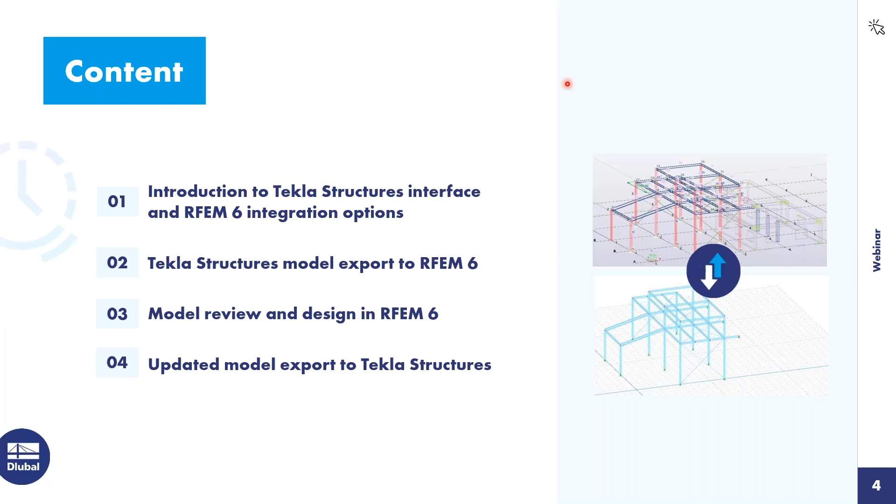So I will begin with giving some general information on the Tekla Rfem 6 interface. Currently, the interface supports Tekla versions 2021 to 2024. This interface is a direct one between Tekla and Rfem, and so the two programs need to be installed on one single PC. Then you want to make sure in your Rfem 6 program and option settings that web services is checked on here.

So that every time Rfem 6 starts up, it will start up the web services. This should be on by default, but it's always good to check that. And then the plugin also must be manually installed after installing Rfem 6. You can find that setup file under this pathway after you install Rfem 6, and then once you install that, you should be good to go.

The structural objects that can be transferred between Tekla and Rfem 6 include members and surfaces, sections and materials, supports and hinges, along with rigid links.

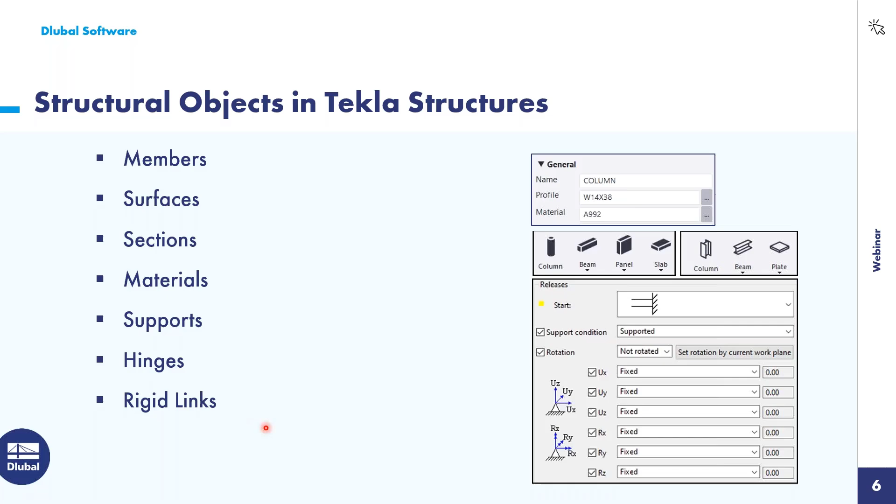Here are the export options. So if you are exporting from Tekla to Rfem, these are the export options you will get. The first option you can see here is the physical model option, and this is basically like a CAD model. So it's the solids without any consideration of the axial positions.

You can see here with this would be a physical model. And if you would export this physical model, you can see that the axial positions here are not lined up or connected at all. The wall here is basically just framing into the bottom of the slab, so there's going to be a space there. And so if you export this physical model, this is what you're going to see in Rfem, which isn't good.

So what you need is an analytical model to be created. You can see here that the axial lines of each element are connected correctly, and so then you will get that correct analytical model in Rfem 6, which is needed to run the structural analysis. So that would be the second option here. Analytical model is what you'd want to choose if you're looking to run a structural analysis.

Next, you have this option for exporting rigid links, which is checked on by default. So if any rigid links are defined in Tekla in the analytical model, then those will be exported into Rfem as well. This option for creating a unique profile for each set of members is checked off by default. If you check this on, then the same cross-sections are going to be given separate index numbers. By default in Rfem, a similar cross-section is summarized with only one index number, so you will get unique index numbers for similar cross sections if you check this on.

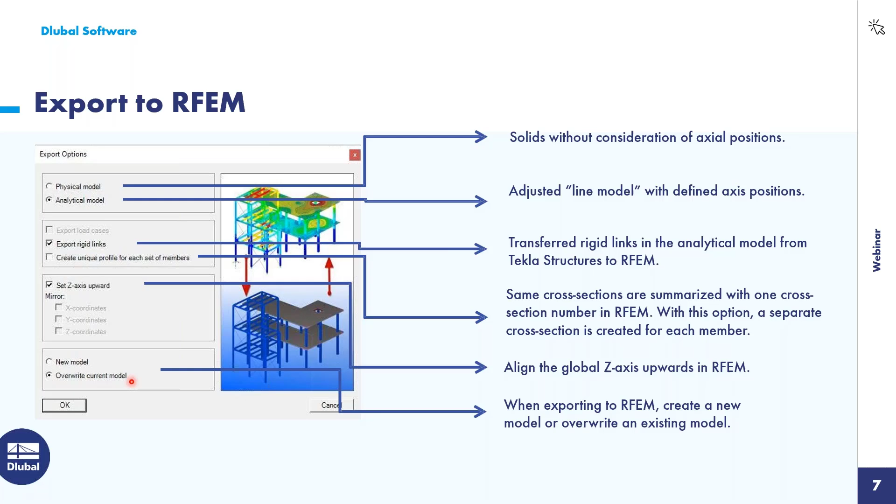Then we have our import options. So here we have a couple import types. This is when you're going from RFEM to Tekla. So you can overwrite an existing model, you can append an existing model, or update an existing model. Overwrite means it'll completely wipe the file and everything will be started from new when importing in. Appending is more for adding if you're looking to add some additional members or parts to the model.

And then update should be used if you're looking to update things like materials, cross sections, and then it can also do new objects as well. And then here's some mirroring options if you're using the overwrite or append option. And so you can choose to mirror about the X, Y, or Z coordinates with that option.

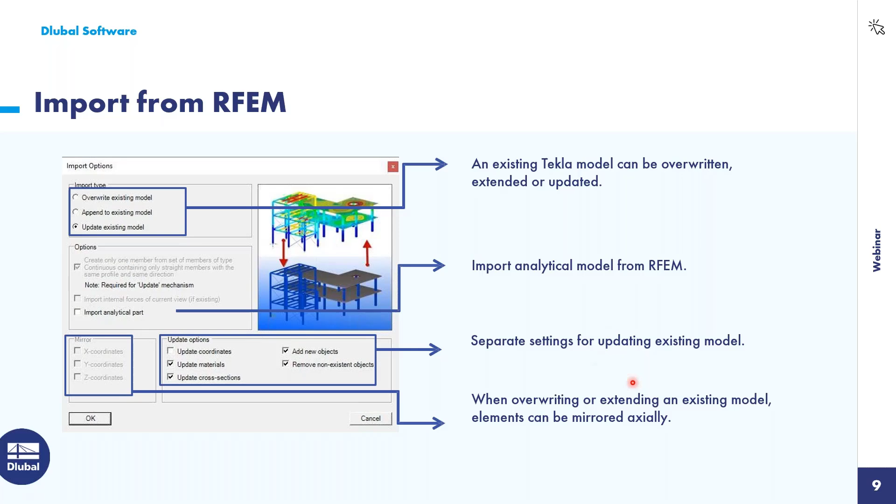And so I would like to show you, we have some documentation on our website regarding regular expressions, if you're not sure how to create regular expressions. This FAQ is linked in the PDF, which you can download anytime during this webinar. And so a regular expression basically allows you to convert a whole series of sections with just one expression.

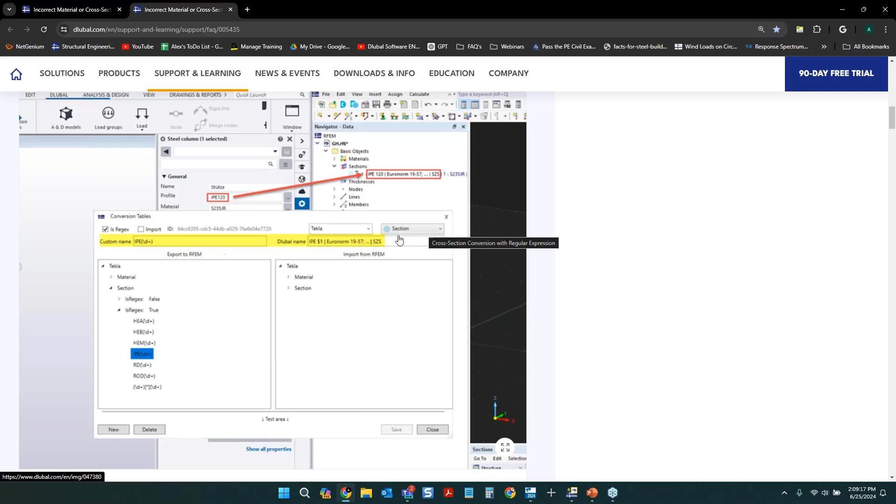And then you can see down here in the conversion table, this is what entering that expression would look like. So on the left-hand side here, you have the Tekla name. On the right-hand side, you have the Dlubal or RFEM 6 name. And so you would create a new expression. And when creating a new expression, you choose if it's a regular expression, if it is an import or an export conversion, and then you can choose if it's a section or material with that dropdown. And so that is how the conversion tables work.

Next, I would just like to go through a couple examples of possible workflows between RFEM and Tekla using this interface. So the first possible workflow is to take the analytical model in Tekla and export that into RFEM. So information about sections, materials, supports, etc. will be exported into RFEM. Then in RFEM, you can add some loads and run an analysis and do some design and optimization. And then any sections or materials or new objects that are added or changed in RFEM can be updated back into the Tekla model.

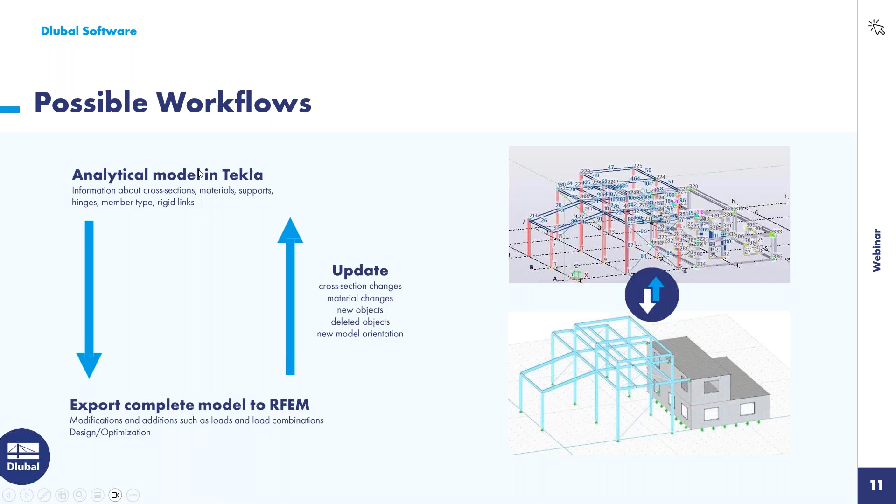And then the third possible workflow is taking a structural analysis model from RFEM that you've modeled and created with some loads and design and optimization, and then that can be imported. The complete model can be imported to Tekla or only part of it, and then you can continuously update that Tekla model as you make changes such as sections and materials, etc.

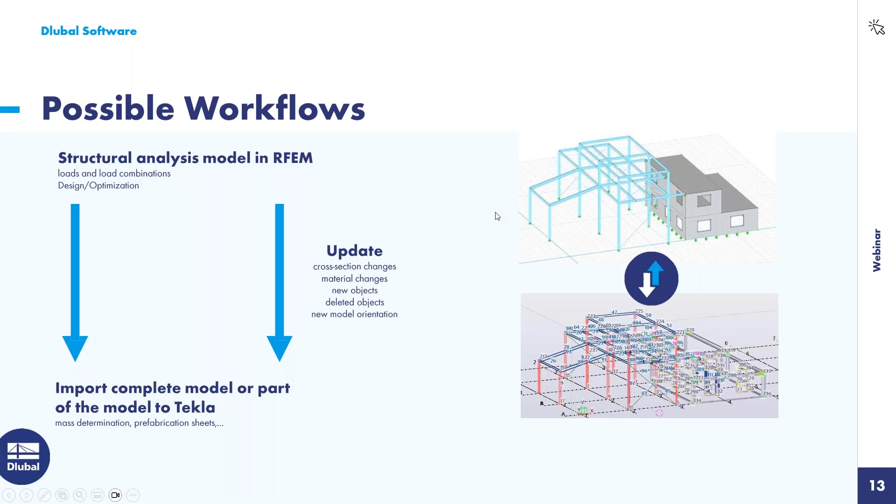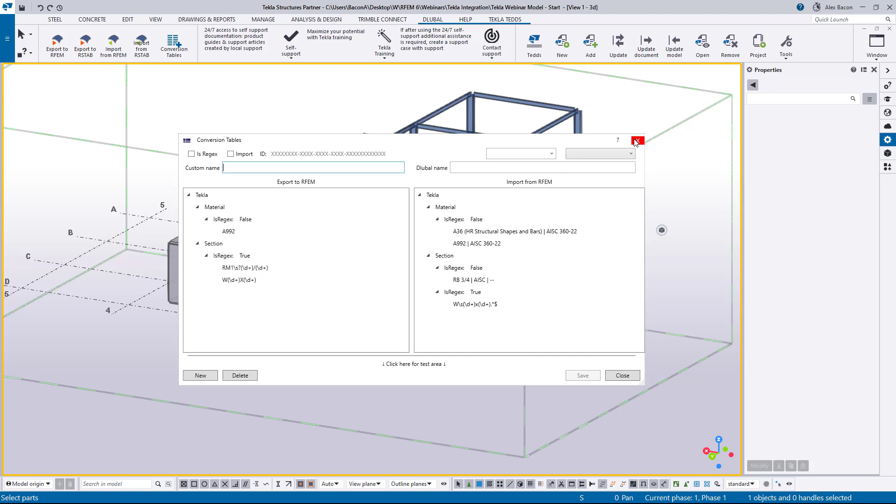And with that said, I want to now export this model into RFEM. So I'm going to move the window over, and you can see here I have a blank model of RFEM opened up. And so now if we export to RFEM the physical model, we can see what that looks like.

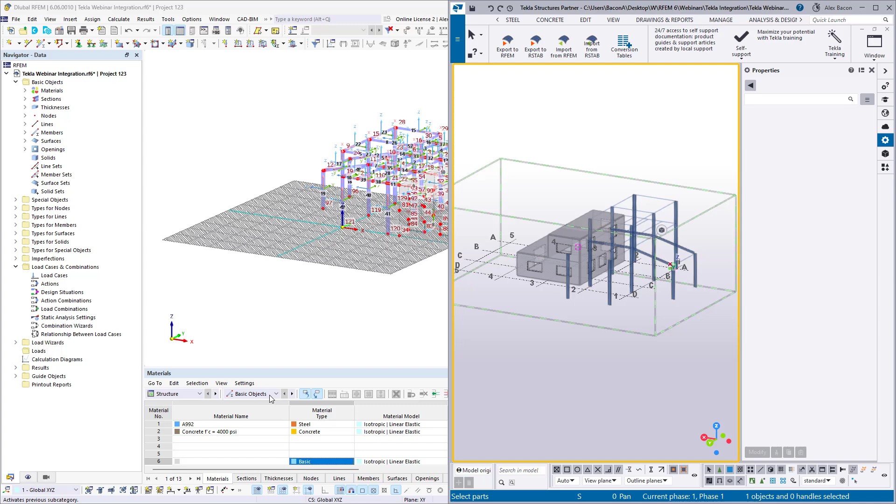And so the connection between the two programs is going to be made. Once that's made, you can see the status in the bottom left-hand corner of RFEM will show that the data is being transferred. And now we can see our model in RFEM. I'm going to turn off the numbering and also the axes and the grid.

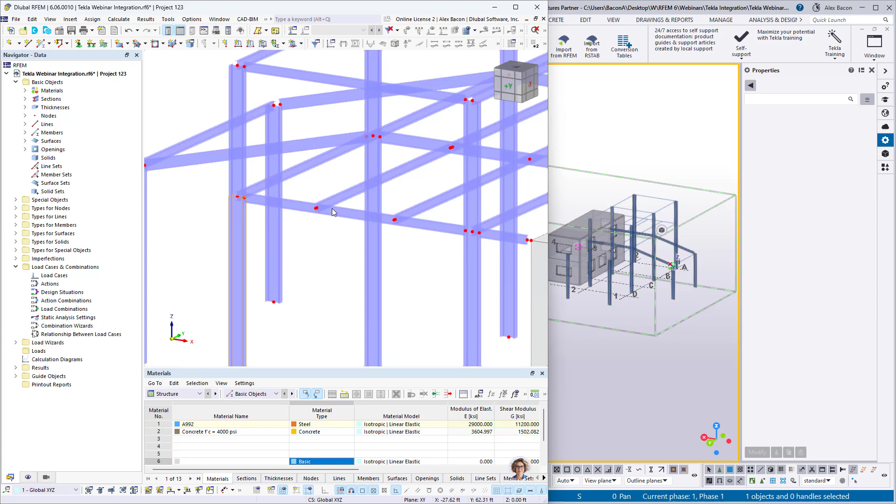If we zoom in here, you can see that it looks like our members are connected. So it looks like our beams are connected to our columns. And if we go into Tekla, we can see that that is also the case. But in RFEM, if we change our model from a rendered view to a wireframe view or an analytical view, you can see that those members are not actually connected in the wireframe.

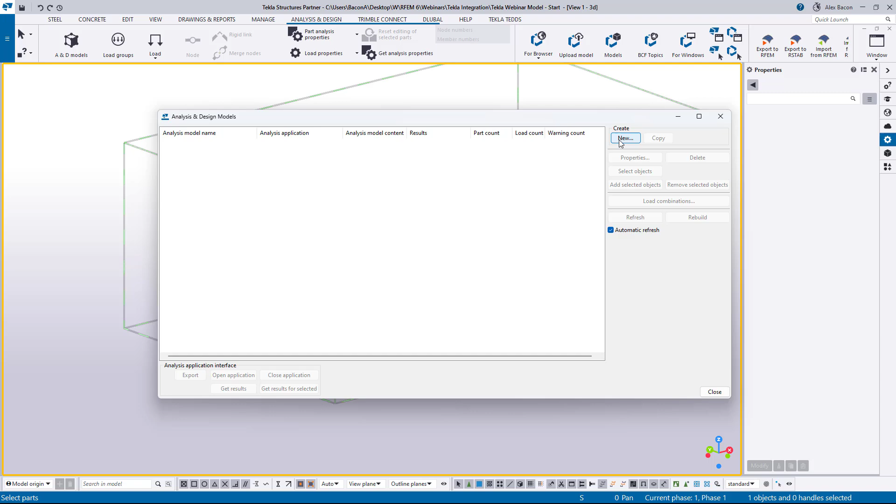So what we need to do to fix this is in Tekla, we need to create what is called an analytical model. To do this, we can go up here to the analysis and design, and we can open up the analysis and design window here. This is where we can create a new model. So we will click on create new, and this will open up another window with some basic properties to define.

In this dropdown, these are just some old RFEM 5 presets that we don't need to pay any attention to, so we want to set those to blank. Then for the name, we will give it steel, because we're only going to focus on the steel portion of this model. It is possible to export the concrete surfaces as well, but we are just going to focus on the steel for now.

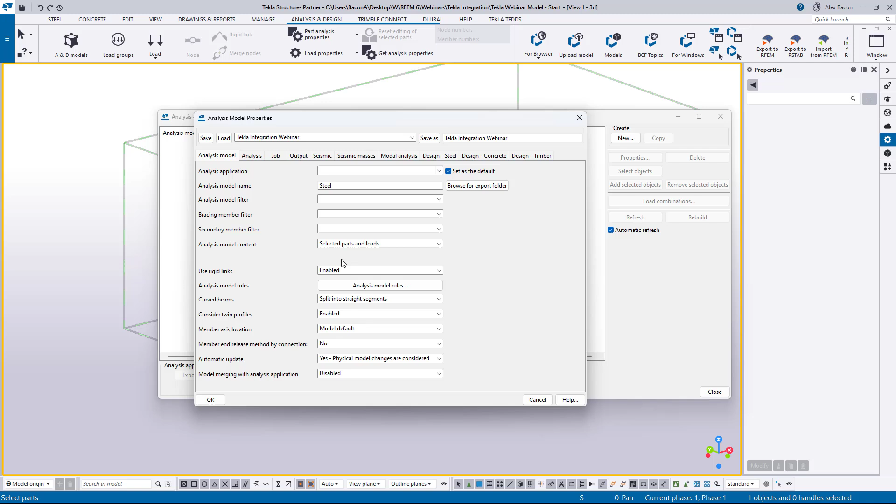You can also define some more settings here, and once you have those defined, you can save them as a preset. You can see here that I have a preset defined, so I can choose that and click load. Now all of my settings from that preset have been loaded in, so you don't have to define these every time. Now I'll click OK, and we have our analytical model created there.

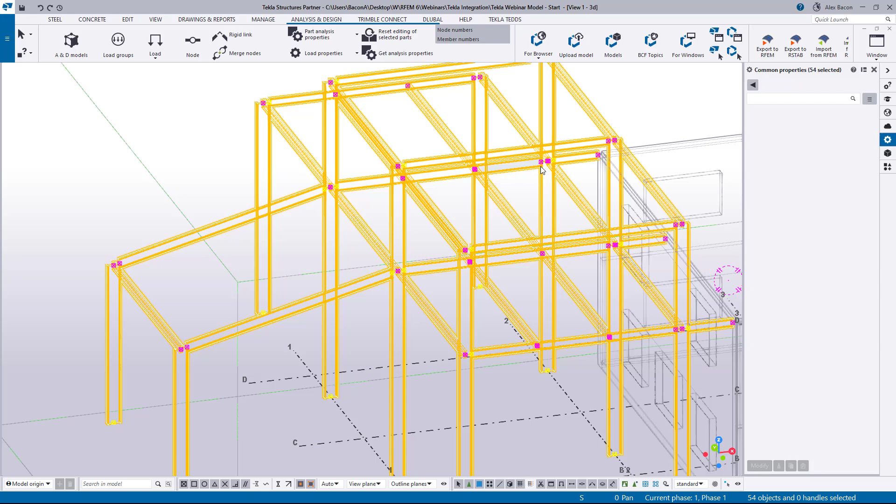And now what we need to do is select all of our steel members to be taken into consideration as the analytical model. One thing I would like to note is if you have any steel connections here, you can have those not be selected, because we don't want to create analytical models based on any of the steel connection components that are defined in Tekla, because those are just profiles and they won't transfer over to RFEM correctly.

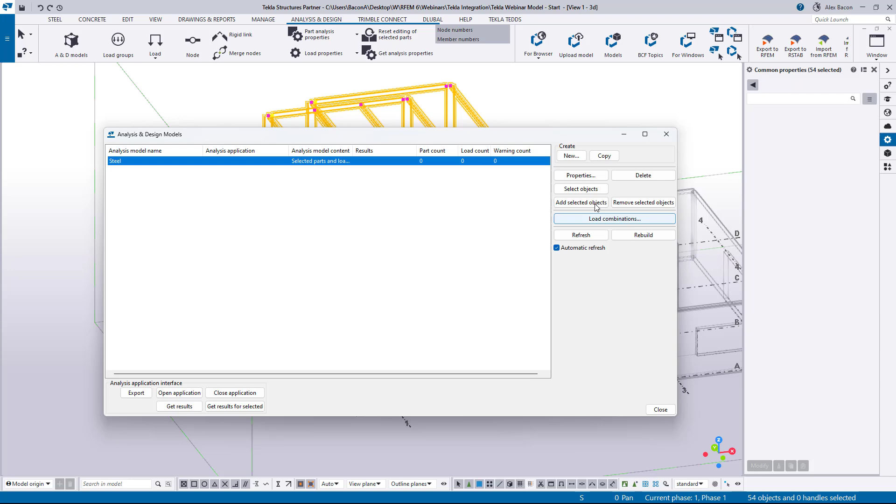So you can turn this button here off, and you won't select those components when selecting the model that you would like to convert into an analytical one. Once you select those members, we can click Add Selected Objects. And so now we have our members here. You can see we have our analytical members created.

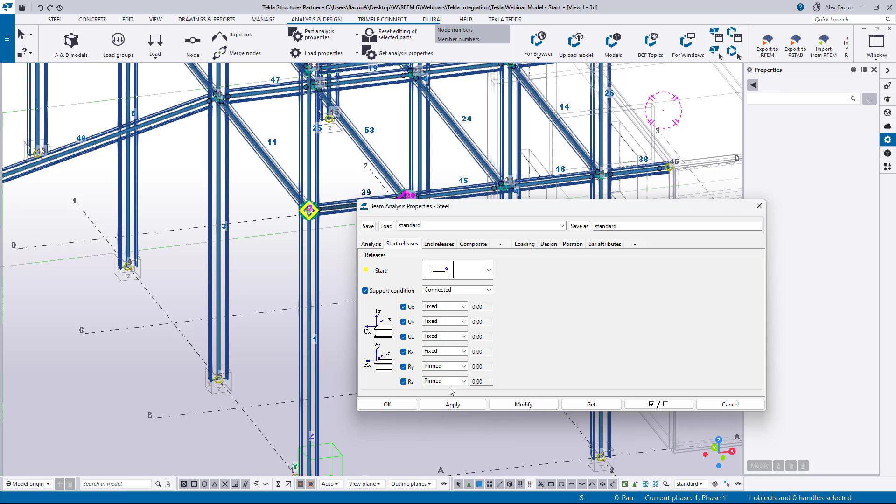And these are generated based on the axes of the beams and the columns. So that is how they reference the center of the beams and columns. And I can double click on one of these to show you those properties. So you can see here this beam is defined as a beam with some start and end releases. You can see by default these are pin connections on all of these.

So what we want to do, and you can change this setting in the future so they are rigid connections, but for now I'm going to highlight the whole model and I'm going to double click on one of these beams, and we want to change that connection to a rigid connection. So we'll choose connected, rigid connection. We want to choose connected again, and we want to choose our rigid connection.

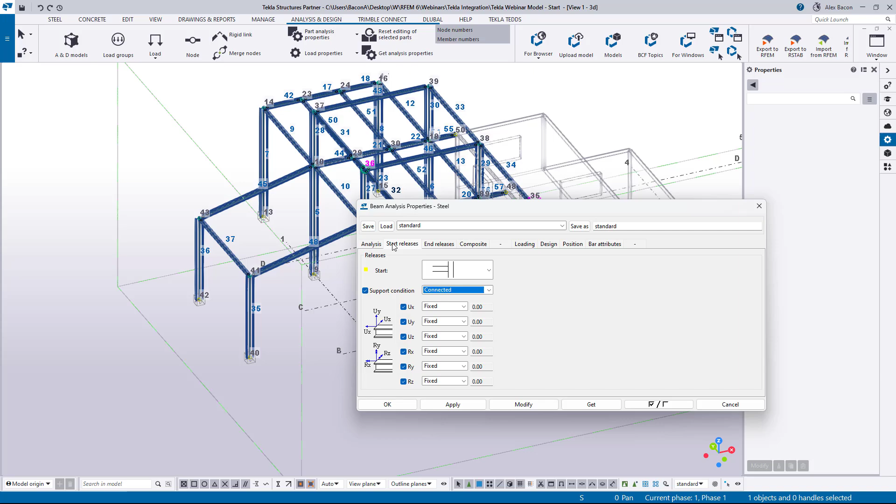We want to make sure this is set to connected and not supported because we're changing the connections and not supports. And so once that is selected, we actually want to re-highlight the model here and click Modify. And so now all of our connections are set to rigid.

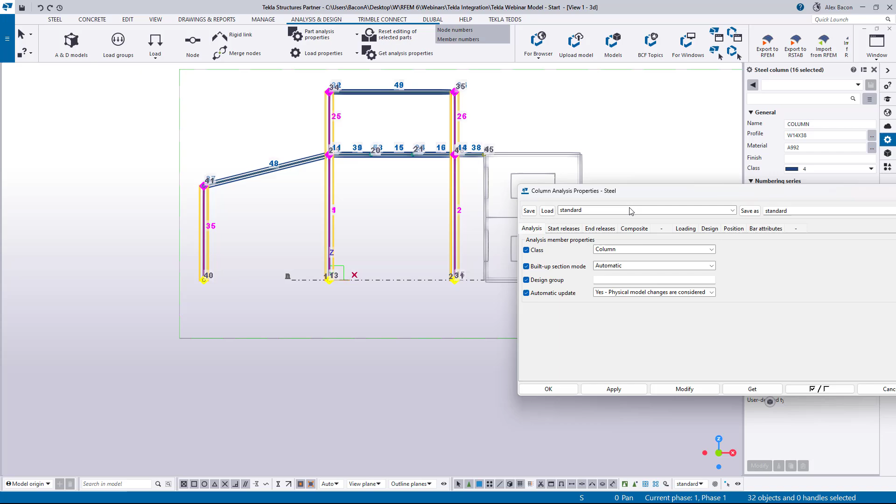Doing that though changed our columns, our classification of our columns. So let's double click on one of our columns. We want to change that back to column, and we can highlight our columns here, change those back to column, modify, and click OK. So now all of our connections here should be rigid.

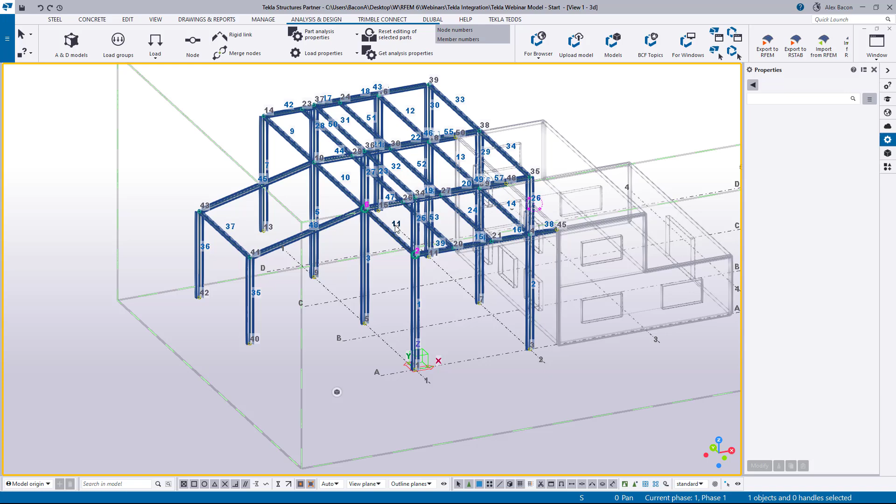So now we want to define some of our beams as trusses. So let's double click on one of our beams here, and we want to change the classification or the class here to beam truss. So then when these are imported into RFEM, these truss members will be set to the member type truss. So they will have pin connections at the end.

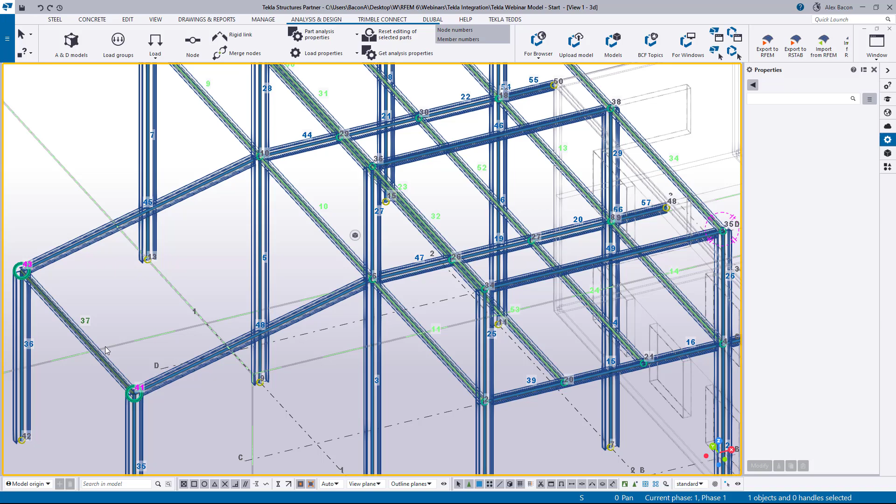And so now that we changed that, we want to select all of the members that we want to change to truss members. So once we highlight them, we can choose Modify and click OK. And so now you can see when I zoom in here, those beams are green now, telling me that they are truss members.

And we also next want to define some supports. So we want to give our columns some supports, and we can do this in Tekla. So we can double click on one of our columns here, and then we can go to the Start Releases and End Releases tabs. You can see that the start releases are color coordinated as yellow, and then the end releases are purple. So you can see the purple node here and the yellow node.

We want to define this support at the yellow node, and so then we'll change this to supported. And you can see there's some predefined supports here. I want to choose the hinge support. And you can see the degrees of freedom here. I want to fix the rotation about the z-axis.

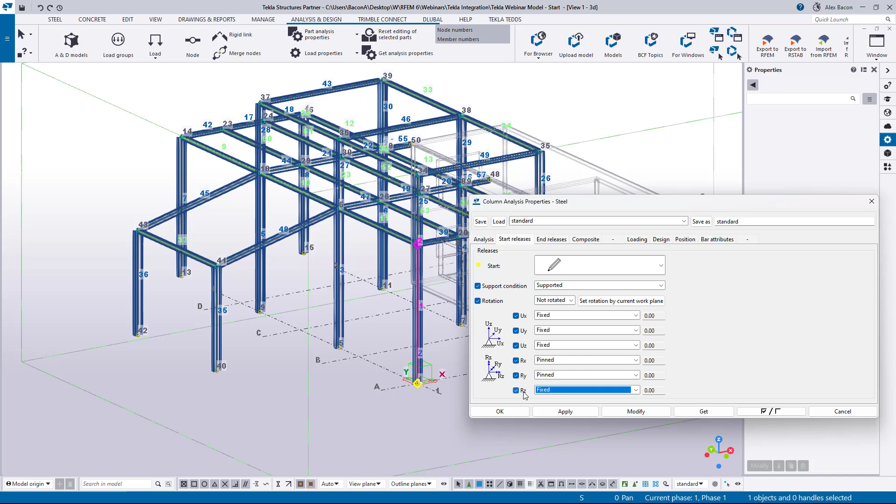And so now that we have that support defined for the start there, we can highlight our columns and choose Modify and click OK. And now the supports are added at the bottom of our columns. You can also double click on the node here and you can edit the support of the node as well if you'd like.

Next, also one thing to mention is it is useful: you can define some presets as well for these. So if you create a support, you can name it and save it as a preset.

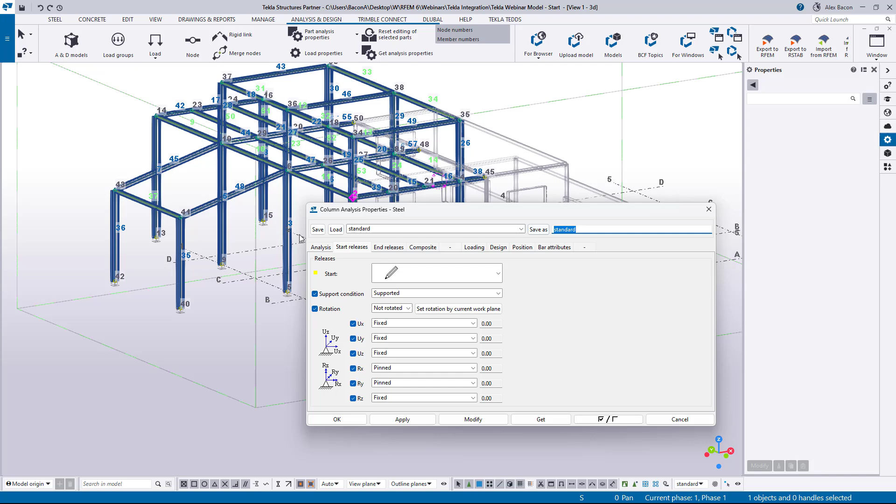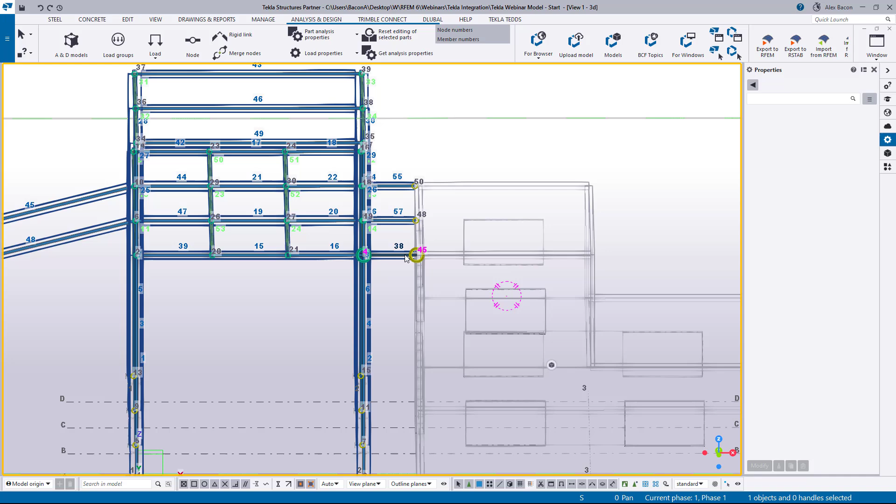Next, we want to add some supports to our steel members here that are framing into our concrete model portion here. So we'll double click on those, and you can see here that we want to edit this end purple node. And so we want to make this a hinge support, well, it's going to be a roller in the X hinge support. So we want to free up the translation in the X direction and fix the rotation about the Z.

And again, you could save this as a roller in X support. Click Save As, and then that will be entered there. And so we want to apply this support to all of our members here and choose Modify. Click OK, and now you can see those supports are added to the end of our members there.

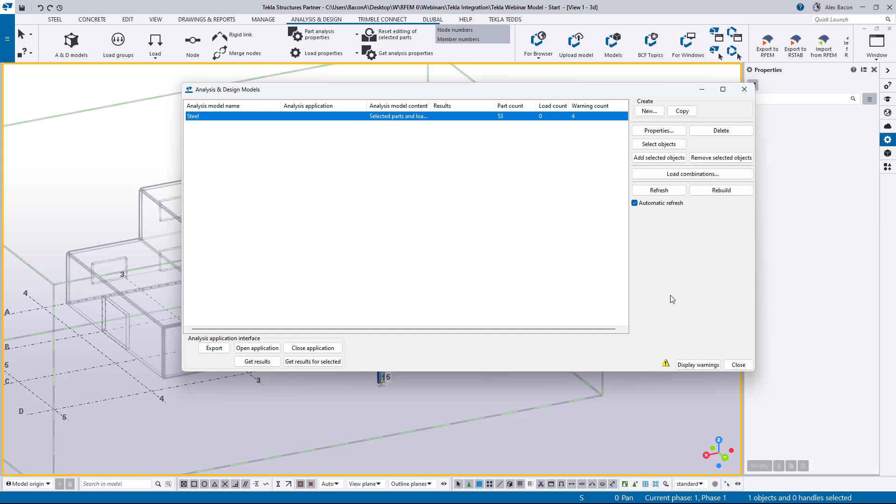And so yeah, now we have our supports created. We want to check all of our connections. And so to do this, we can open up the Analysis and Design Models window and go to the Display Warnings. And you can see we have some warnings here.

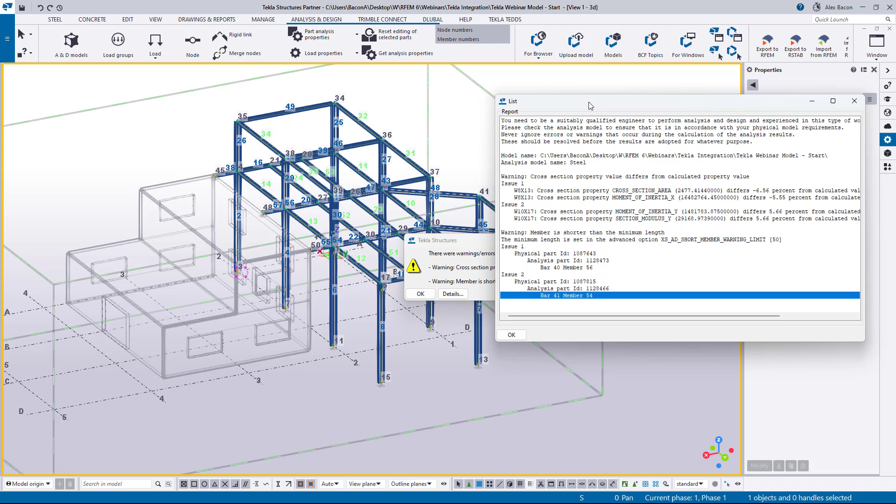This first warning we can ignore, but the second warning about a member being shorter than the minimum length we want to check out. So if we want to see exactly what that means, we can click on Details. And under Details, we can go under that warning and we can see and click on the analytical part that warning has to do with. And so then we can see that's highlighted graphically here.

And so then we can right click, and if we still aren't able to locate that warning, we can go to Zoom and Zoom Selected. And so now we can get a closer view of what that warning is giving us. And if we zoom in closer here, we can see that we have two nodes here. And we want to fix this.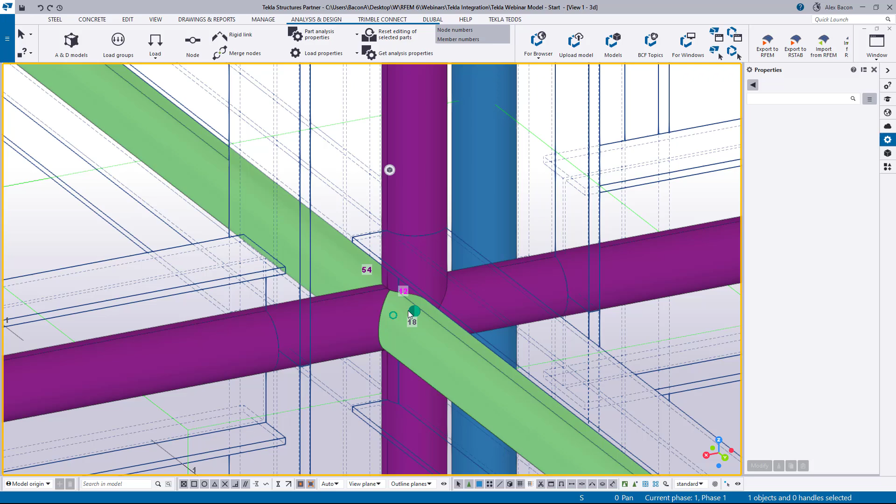And so you can see this node here is connecting these two members, and this node here is connecting these four members. And so we can see that this member here is just a little off axis. If we go down here, you can see that this member wasn't connected properly, so the program added in a rigid link here. And again, you can see we have two nodes there. And so this is a simple fix. What we can do is simply merge these nodes.

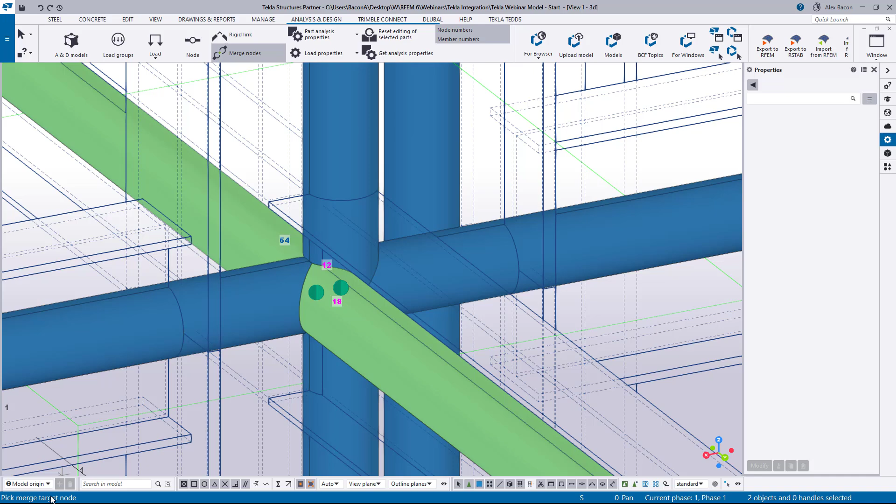And so I can hold Control and click on both of those nodes, and I can right click on them and hit Merge Selected Nodes. And now you can see down here in the bottom left, it's telling me to pick a target node, and this is our target node. So I'll select that, and you can see that now that analytical member has been moved as the node has been merged, and so now we only have one node there. And again, down here you can see that rigid link has disappeared as our node has been merged.

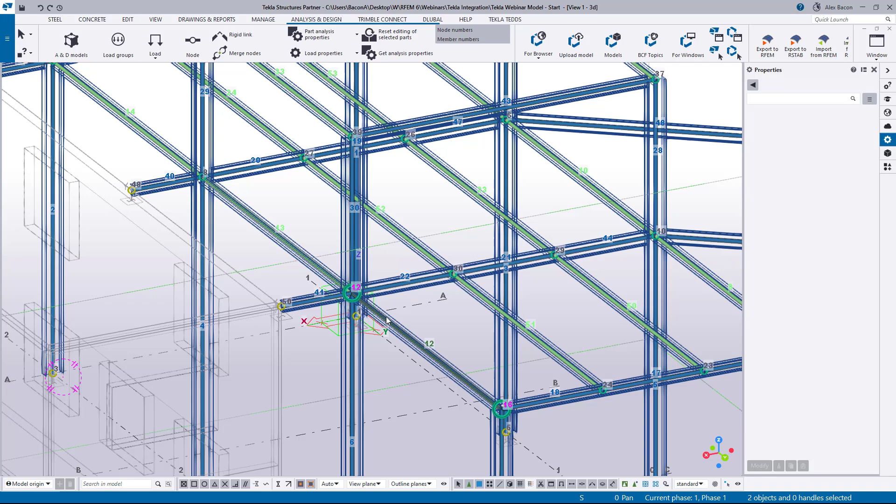And an important note on this is that this only affects the analytical member and not the physical. So only the analytical member will move. The physical model will not be affected by this. And so then if we go back under the Analysis and Design panel and go under Display Warnings, our second warning there has disappeared, which is good. So that tells us that all of our model is connected.

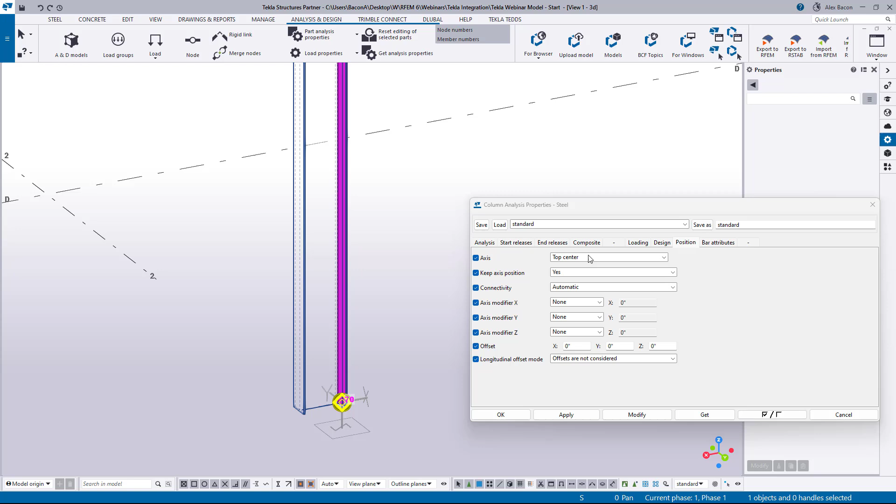And so now the last thing I want to show you before exporting this model into RFEM is that you can change the position of the analytical member within the physical, or you can change the axis position. And so if I double click on one of these, for this column for example, we can go to position. And under position, we can change this from the reference axes to the top center if we'd like. So you can see how the axis has moved there to the top center of the member. And so that is one bit of information I wanted to point out on how you can change the position of the analytical member.

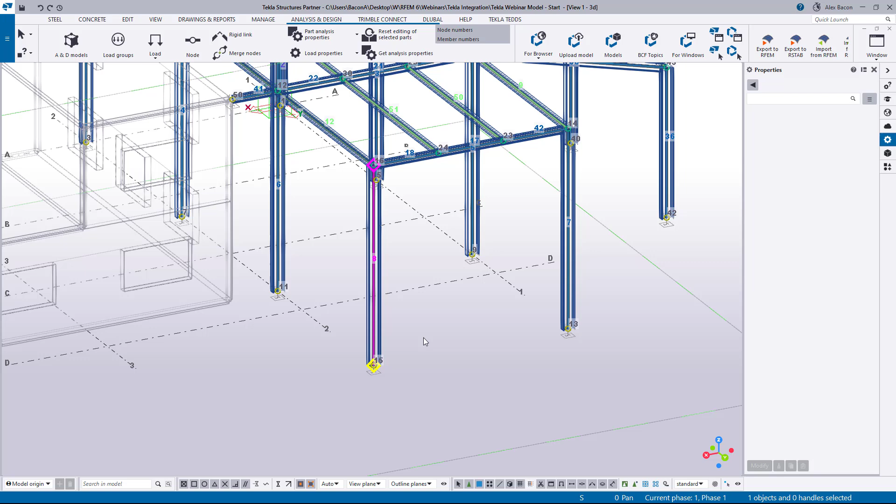So now let's transfer our analytical member into RFEM. So if I exit out of the analysis and design panel, we can take a look at the materials that I have set for each member. So you can see that I have the correct profile and the correct materials set for each member. And this is mapped out again in my conversion tables here. So I have my W shapes here entered as a regular expression, and so all of my W shapes are converted. And then I have my steel A992 material here set for the export and mapped out correctly as well.

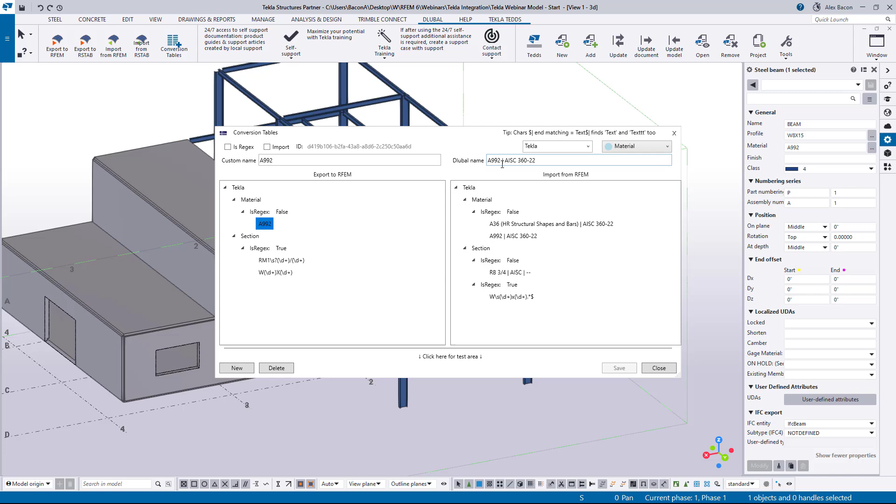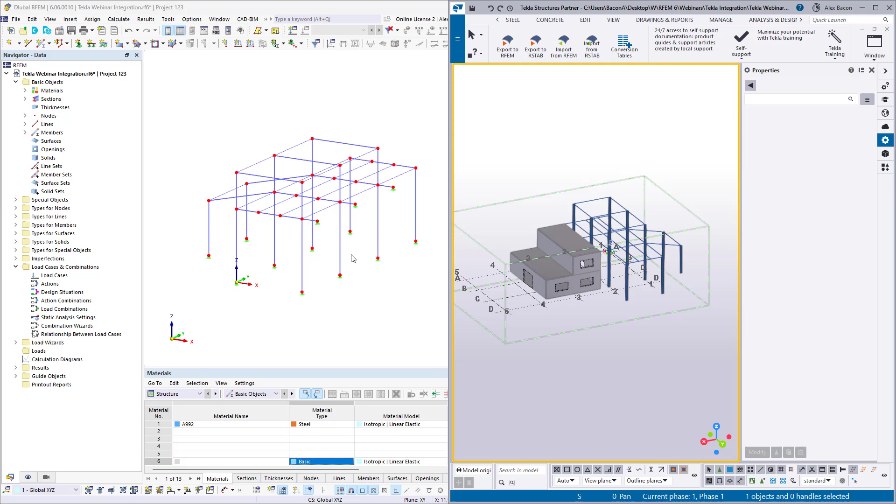And so now we can transfer this model, so we can go up here to export and export to RFEM, and we can override this bad physical model that we have right now. So if I go up here to export to RFEM and I choose analytical model, we can click OK. And so that connection is being made. Again, you can see the status there. And now we have our analytical model in RFEM. So if we zoom in here, we can see everything is connected properly.

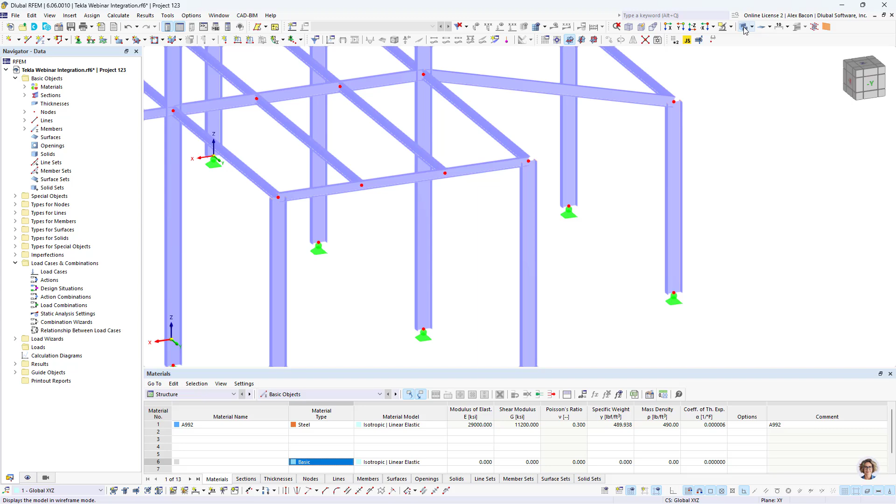And we can also change the rendering. And so now we can see that if I change my rendering down here to be based on the section, the correct sections have been imported in, my correct W shapes, along with the correct material and the correct member type as well. So these member types are set to truss, which means they have pinned start and end conditions, so moment transfer will not be there, it's released.

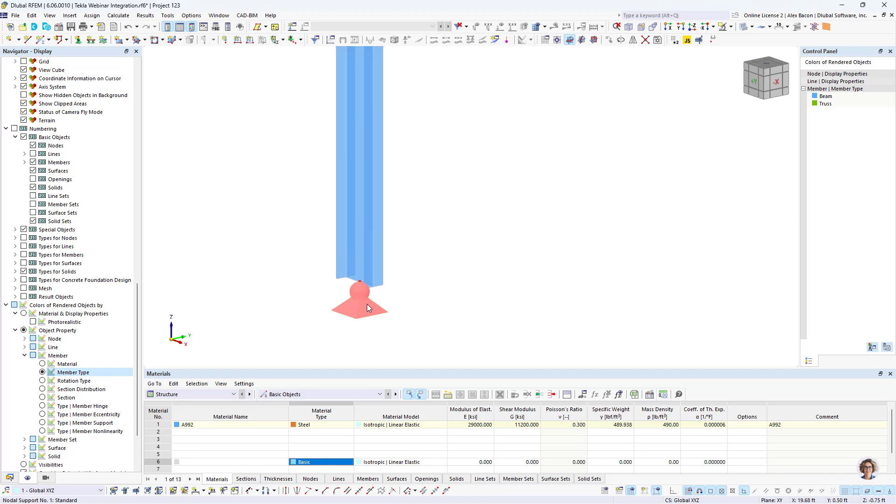We have our correct supports down here. We have our hinge supports and also our roller supports here. So I can double click on one of those and take a look at that.

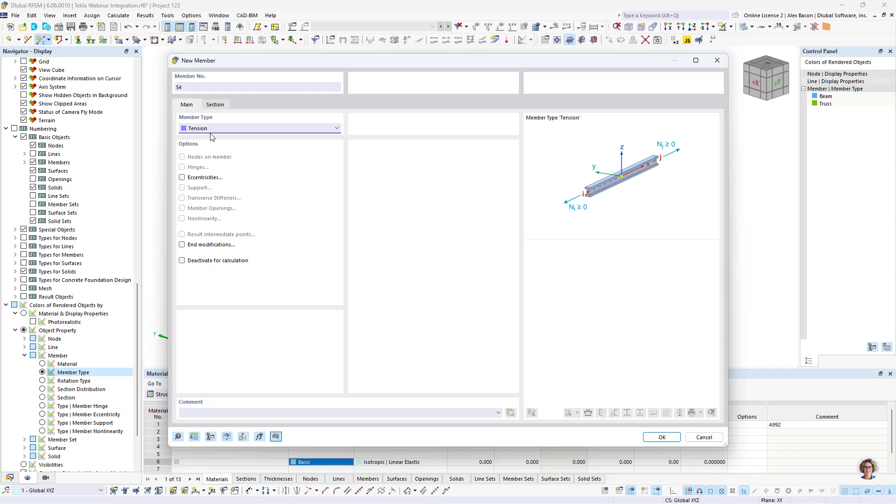And so now we want to define our X bracing. To do this, we can go up here to create a new single member. I want this member type to be set to tension. With this member type, it's nonlinear, which means that this member can only take tension forces and not compression forces. And then under the section tab here is where I can define my section and material.

So I'll open the section library and I will go to my standardized steel bars. I filter to the AISC and we want to choose our 3/4 of an inch diameter bar. Then we want to give this the correct material. So under steel, AISC 360-22, we want to choose the Steel Imperial A36 material. Now that we have our material and section defined, we can click OK.

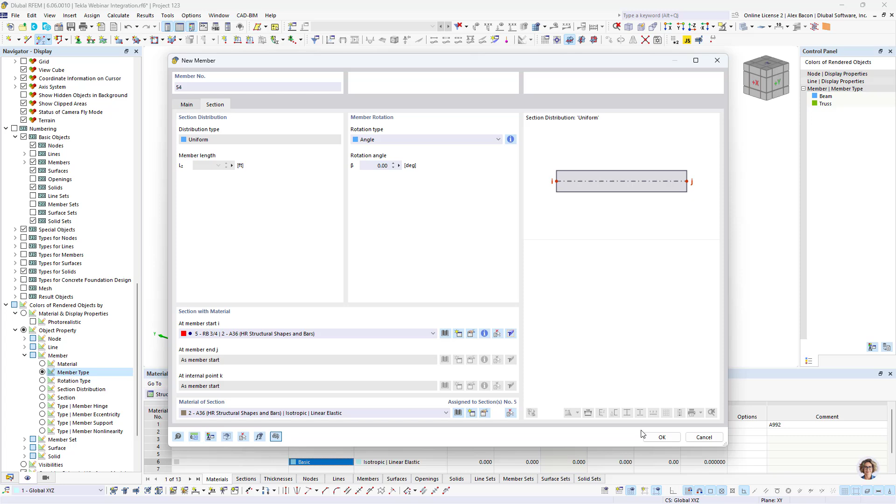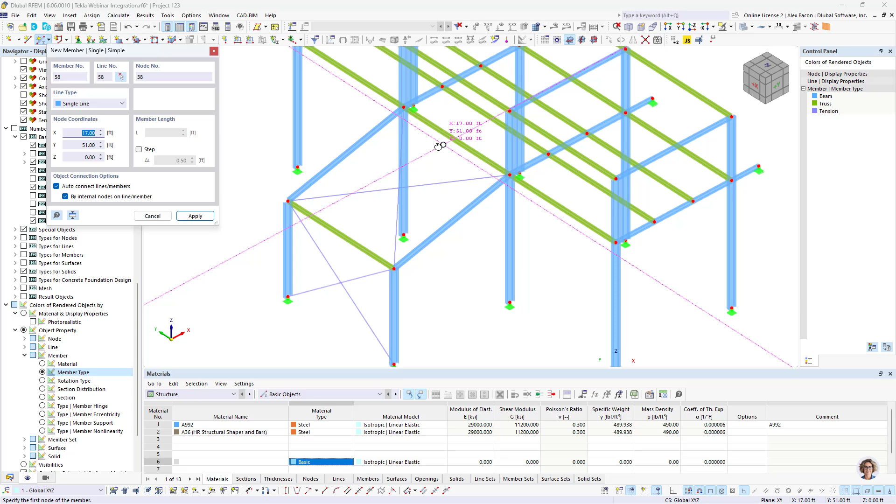And now we can draw and snap to the nodes here to create our brace members, making sure to snap to our nodes so everything is fully connected, like so. We're going to do the same thing for the back side. So now our X bracing is defined. You can see that here.

And we can move on to adding our loading in. Before we add the loading, we have to create load cases for the loading to be assigned to. If I go up here to my base data, under add-ons, you can see the combination wizard and classification has been set. So our standard here, the ASCE 7, we can have our action categories set based on that, and then our load combinations created automatically. We have our load wizard turned on, so we can create or use the snow or wind load generator, and this is where you can set that standard.

So we'll click OK, and we'll go up to this button to create a new load case. This first load case is going to be self-weight. We want to create a new static analysis setting. This is going to be set to geometrically linear. And then we can create 2 new load cases. This one will be live with an action category of live. And then this one will be snow load, and that will be set to snow.

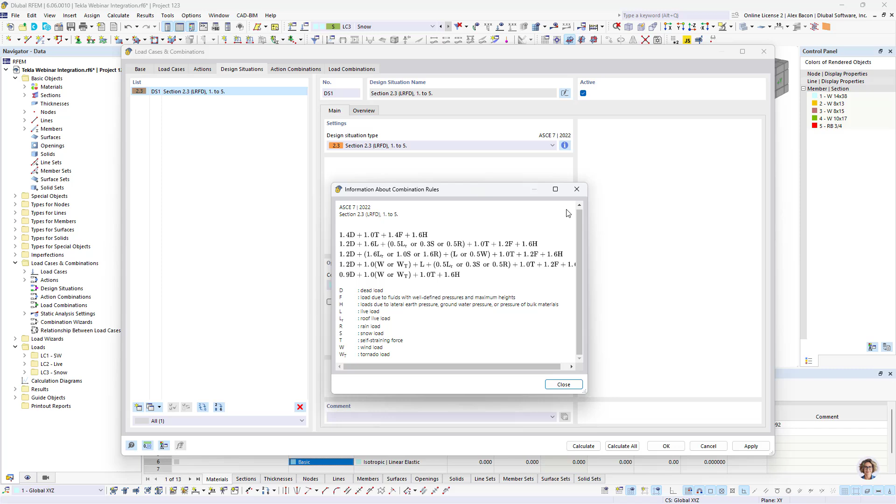Under the load combinations, you can see those are again generated automatically based on that design situation. You can see that overview here, and now we can click OK. Now we have our load cases that we can assign our loading to. We'll start off with live load. We're going to keep self-weight. We're not going to change self-weight at all. We're just going to have that be self-weight, which is generated automatically.

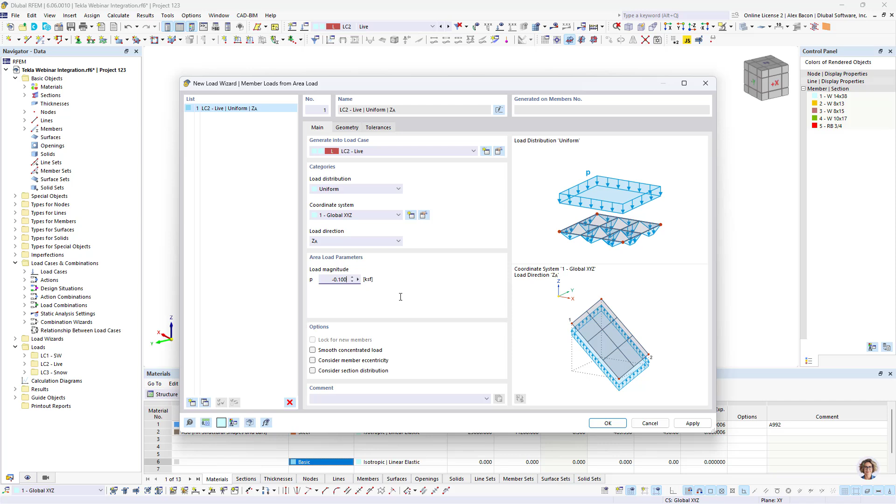And for our live load, we want to use one of our load generators. So if we go up here to insert, and go into load wizards, we have a load generator called member loads from area load wizard. So we can create member loads via an area load. And so here we have live load set to uniform and the global Z direction. And now we just want to give this a magnitude.

And so then under geometry, we want to select the geometry or the corners of this area. So I'm going to add this to this first floor here and select all of my corner nodes using that graphical button. And then we also want to remove influence from members parallel to this straight member here, selecting that graphically and then clicking OK.

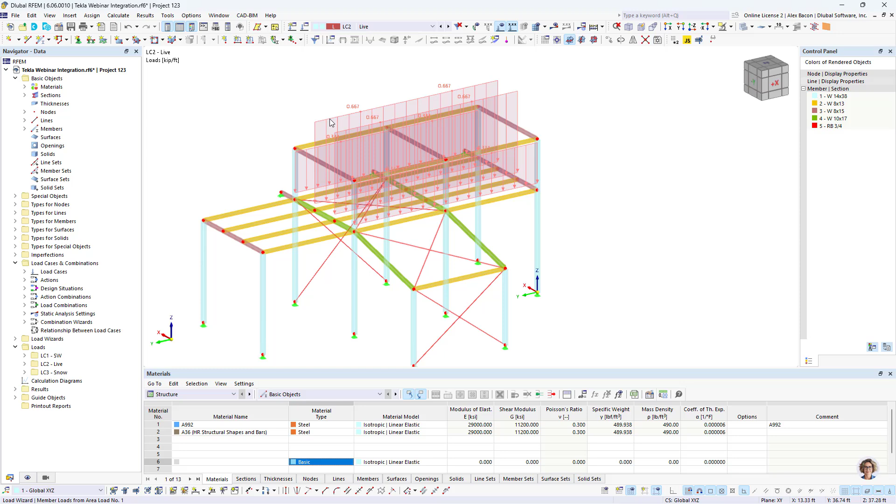And so now you can see this area load on that floor over those members, and if you want to display this separately, you can do so like that, and we can decrease the graphical size of this, and so now you can see the member distribution there. And so I'll uncheck that. Now we want to move on to our snow load.

So with this, we're going to use another load generation or wizard tool. This is our snow load wizard tool. I can right click on snow loads and create a new load wizard snow load.

The roof type is selected here as flat/mono pitch. Then we want to give this a name, so we'll name it roof 1, and we'll choose this graphically again, going around here and selecting our corners.

Then under the next tab, parameters, we can either enter these parameters as user defined, or we can enter them as map using the map and parameters.

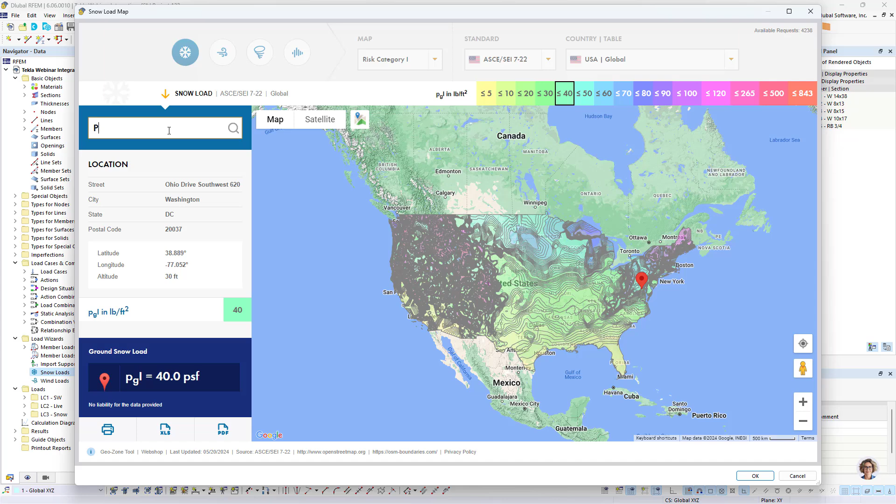With this, we can enter this information automatically from our GeoZone online tool by clicking that button. It's set to snow, and you can enter any address you would like. I'm going to type in Philadelphia, PA, which is the location of our US office. Then you can see here you'll get your ground snow load, and you can click OK.

And all of that information will be filled out automatically under our parameters here, and we will get our loading results. Then we can make a copy of that first load.

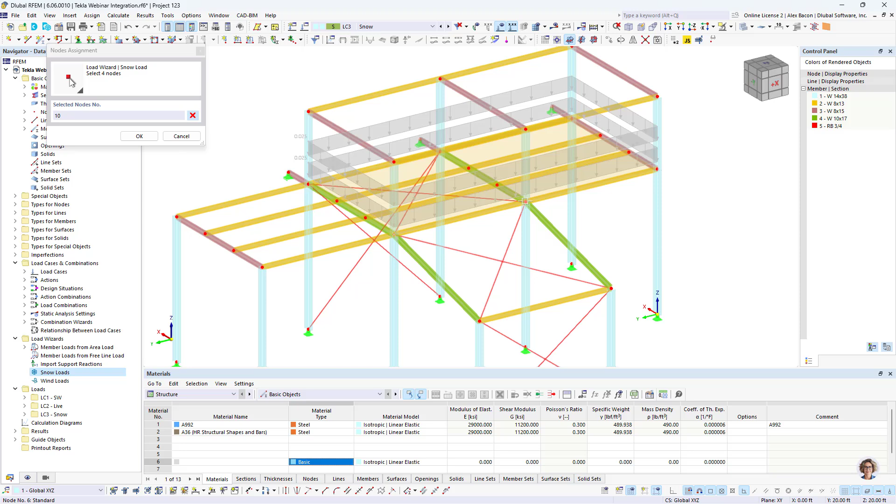We'll name the second one roof 2, third one roof 3, and then all we really need to do for these copies is change the location of our snow load here. So we'll change the geometry like so, and then we'll change roof 3 here to this sloped portion.

Now that we have those, we can click OK, and we can see our snow loading there. If I right click and display separately, you can see how that loading is distributed, and you can remove influence from any of these members if you'd like.

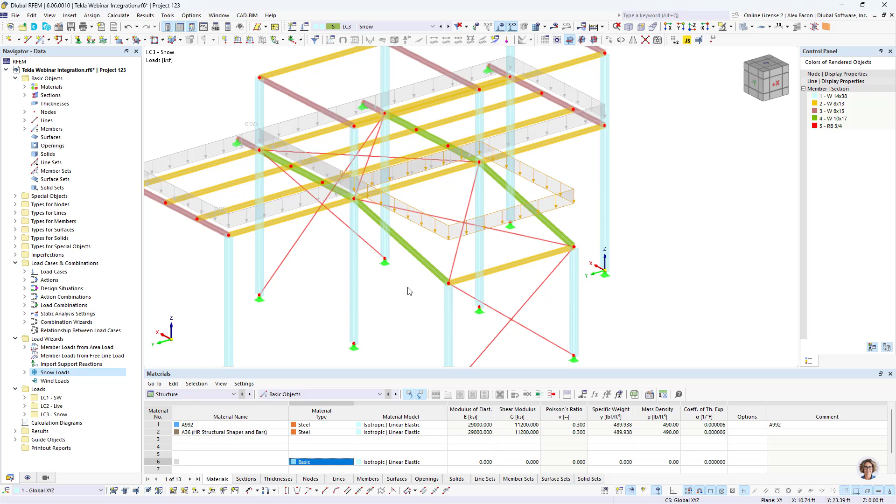But that is the loading we have now. So we have our live load and snow load, and then the dead load with the self weight of the structure.

And now we want to run our steel design. So first I want to go up here to the base data and go under add-ons, and I want to check on steel design and click OK. So we're turning our steel design add-on on, which gives us our folder down here.

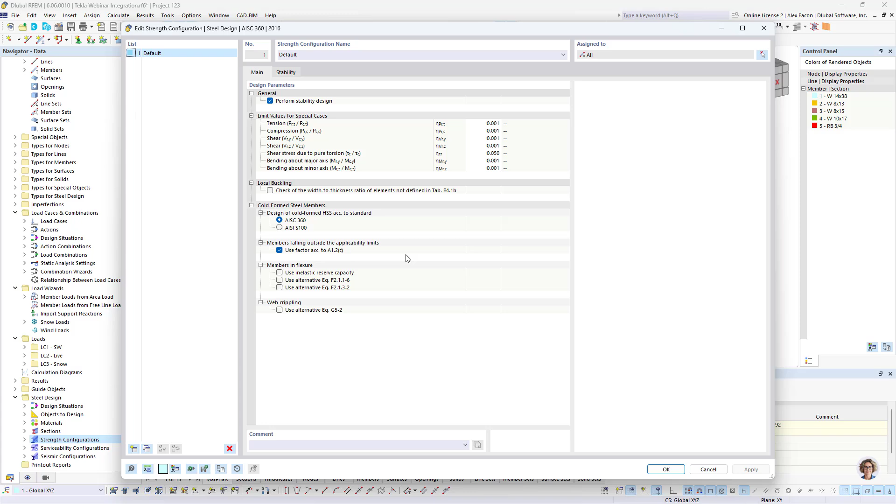I'd just like to say that this webinar is not focused on design, so to save time, I'm going to disable the stability analysis. To do that, I can right click on my strength configuration settings here, go to edit, and turn off perform stability design, then click OK.

And if you want more details on the steel design, there are dedicated webinars for the AISC and CSA steel design on our website that are recorded, that if you'd like to get more into the details of that, you can check those out.

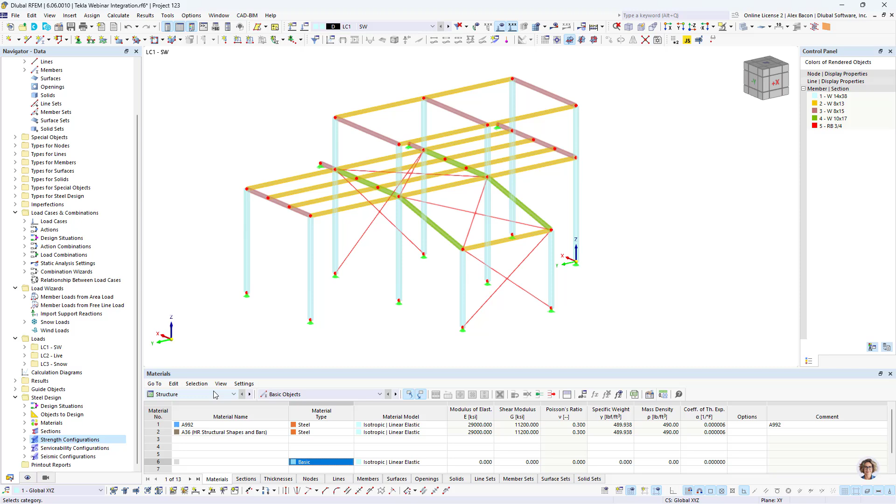So now we can run the steel design by going down here into our tables and going to steel design. You can see for our input data, we have our design situation. We're just looking at our strength limit state.

For steel design, the objects to design, we're designing all of them. Materials here we have entered, and then our sections. So what we can do is go up here.

Okay, so I need to make a correction. This roof, or this snow load, roof 1 here, needs to be defined at the top here. So we'll go in there, double click it, and fix it, and we will click OK.

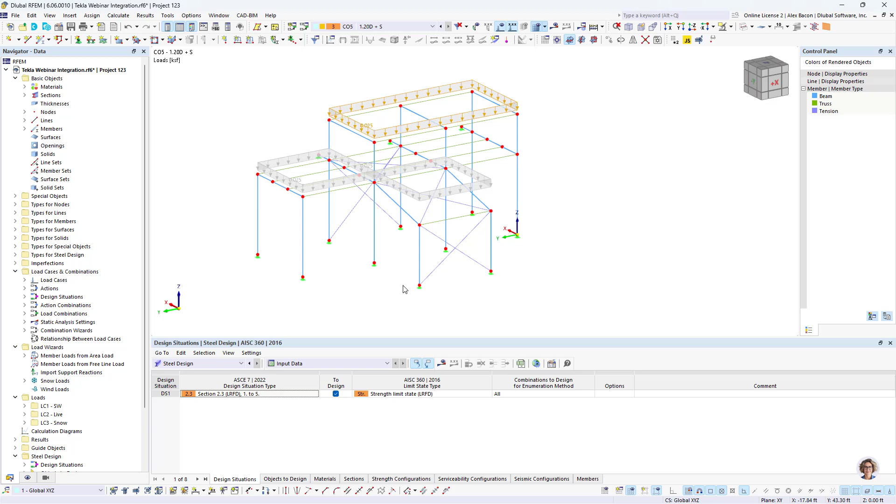And so now let's run our steel design by clicking the button here, show results. The steel design will run, and now we can see our design ratios.

We can get an overview of the ones that are not passing, shown in red and above the 1.0 design check. So I can show you how to optimize these now.

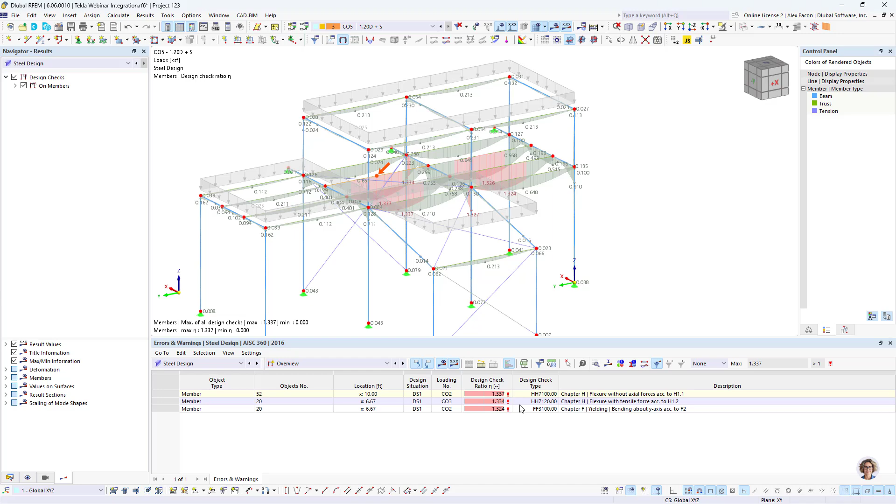We can even get a better view if I turn off the loading here. I can select these members and isolate them, and we can see here that we change the rendering. You can see here that our 8x13s are not passing, along with our 10x17s.

We can even go down here to design ratios on members and take a look at that, so we can get our design detail checks. We can also look at these design ratios by section, so again our 8x13, our 10x17.

So we can go to the input data, go under sections here, and then go to our 8x13 and choose to optimize this current row. We can go under 10x17 and choose that option again.

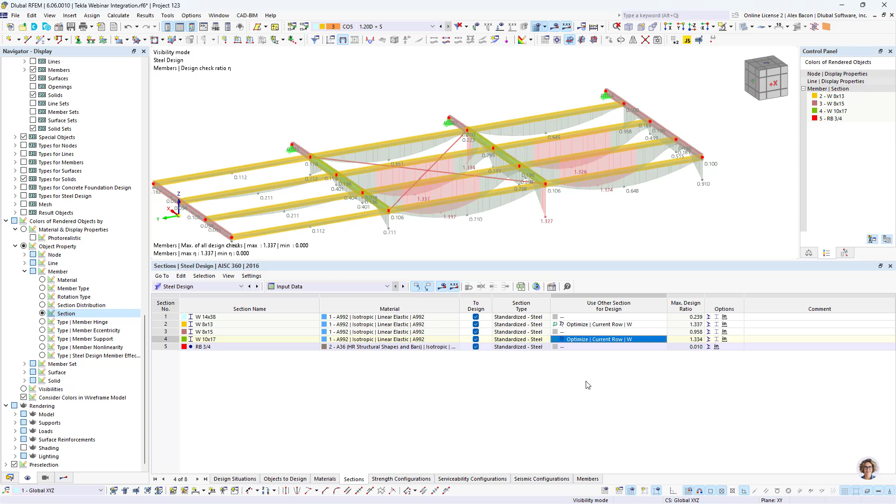With this option, the program will choose the smallest section possible to get right below that 1.0 design ratio. So we can go up here and click on Calculate All to rerun the calculation.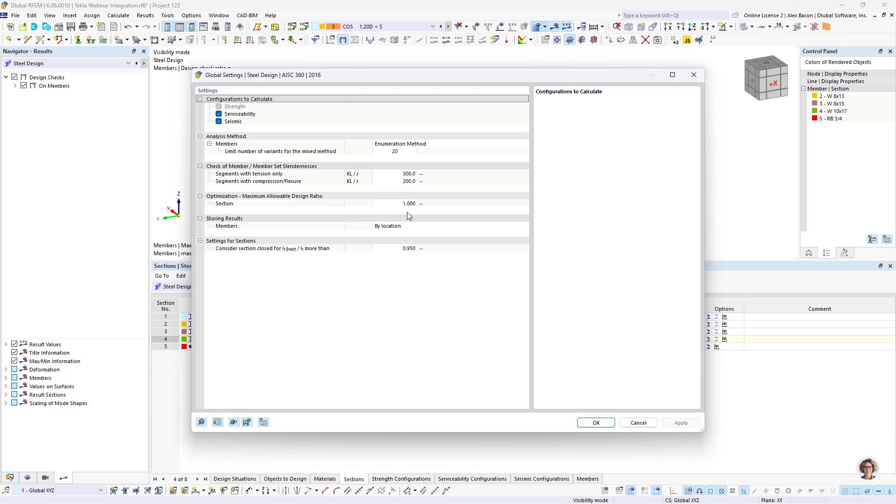You'll see that optimization is being run for the steel design, and now all of our ratios are below 1.0. You can see this one's at 0.19 or 0.91. If any of these ratios are too high for you, getting too close to 1.0, under the input data we can go to the global add-on settings and adjust that factor for the optimization to any factor you'd like.

Now that these sections have been optimized, we want to right-click on them and choose this option to use all optimized sections in model. We click yes. It's going to delete the results because we'll have to rerun them based on the new self-weight.

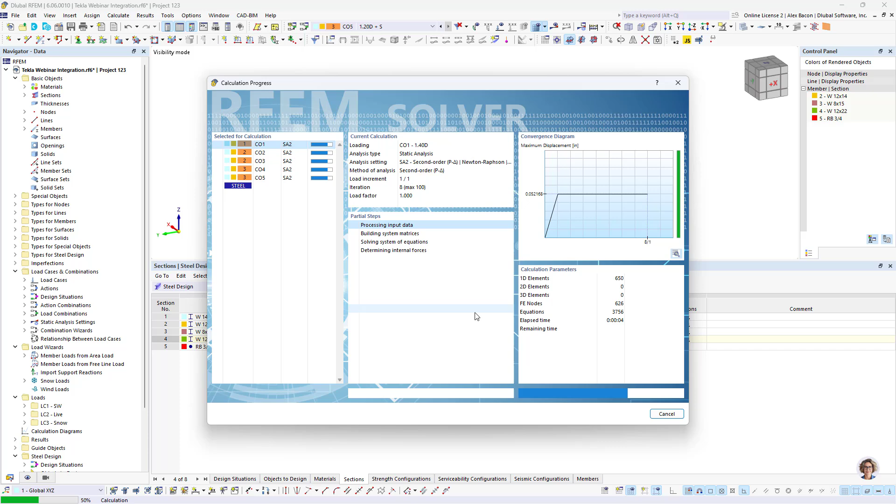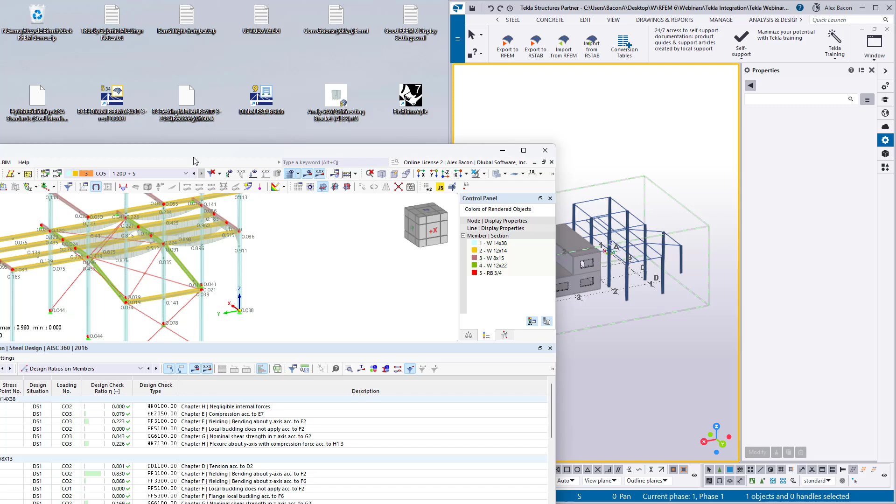Now we have our steel design. To summarize, what we did was import our model in from Tekla, added some bracing and loading, and then ran the steel design. Now, after optimizing the sections that were failing, we want to update our structure in Tekla with our new additions and cross sections.

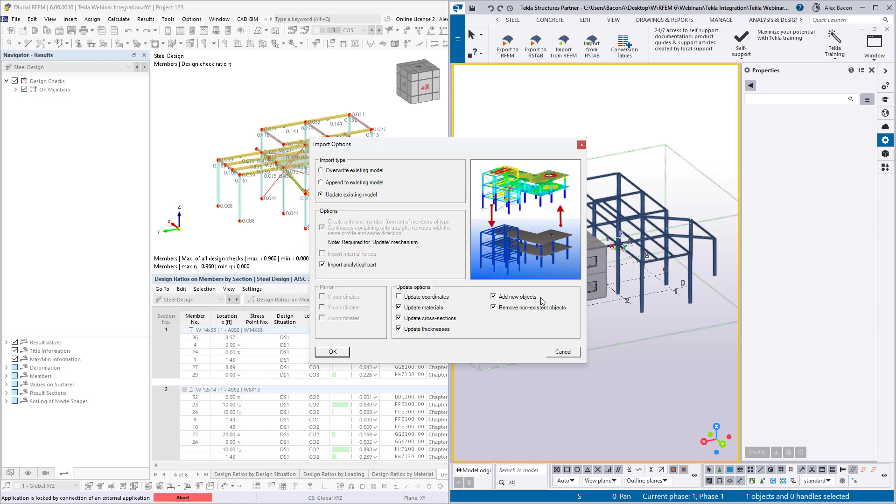So we can go back to Tekla, and in Tekla what we want to do is choose import from Rfem, and that connection will be made between the two programs. Now we want to choose update existing model. We also want to import the analytical parts, and with update existing model we can use these options to choose what we want to update. So we want to update materials, cross sections, thicknesses, and also add new objects and remove non-existing ones. We'll click OK.

Now you can see that in Tekla, our bracing has been added with the correct profile and material, and the correct sections here have been updated as well. So we have our 12x14s here with our correct material.

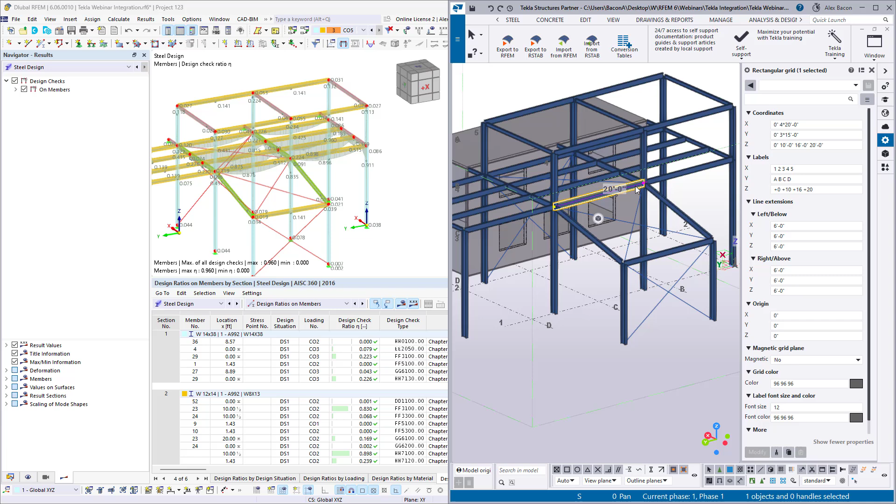So yeah, that's the workflow. We went from Tekla with the model that was created here, created an analytical model that was exported to Rfem, where we ran the analysis and design, optimized some sections, and then imported this and updated the model in Tekla with the new sections and materials.

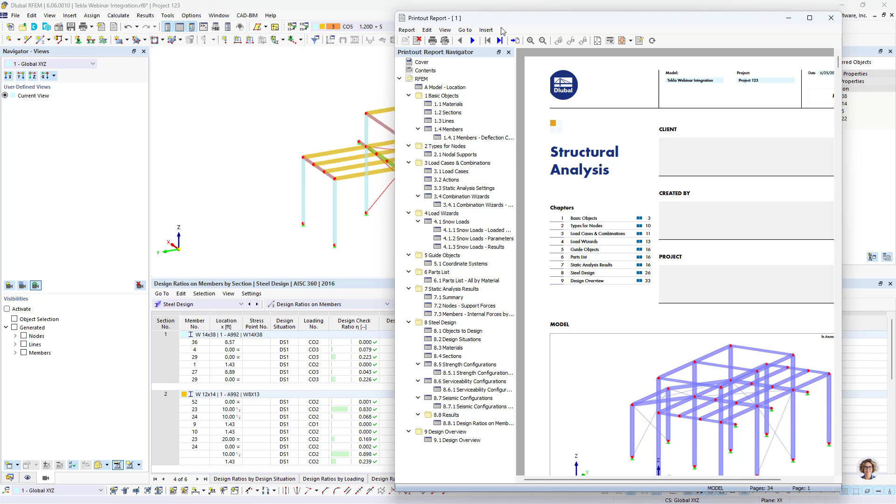The last thing is probably the documentation for the steel design, which we want to create. To do this, we can create our printout report. We go up to new printout report, and down to save and show. Then the printout report will pop up, and you can see here what it looks like.

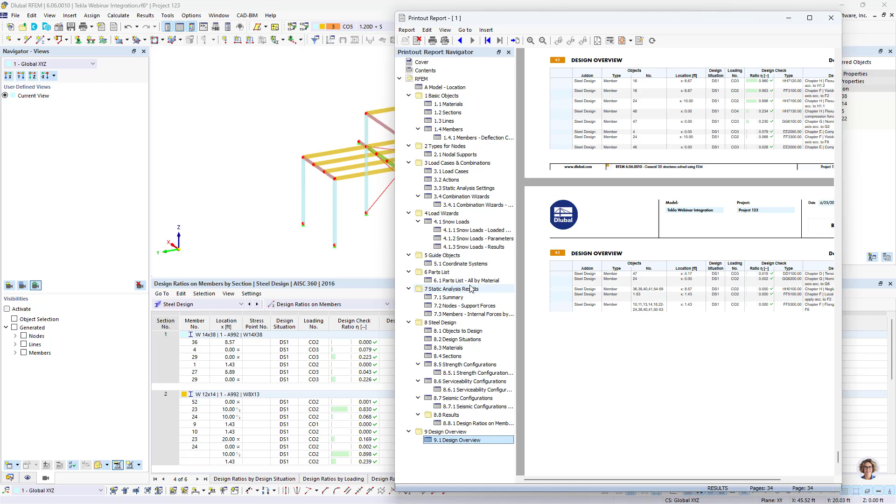We have our pages, with all of our information laid out. We have our materials, our sections, and then our steel design down here, including our objects to design, design situations, materials, and some results of our ratios. We can even get a design overview. Inside this printout report, we can also add in some graphics.

You can keep the printout report open in the background while you're still using Rfem. So let's say we want to add this graphic. We can go up and choose Print Graphics to Printout Report. Then we have some options here, maybe we want to check on window filling, and then we hit Save and Show. Now we can see that graphic has been added to our printout report.

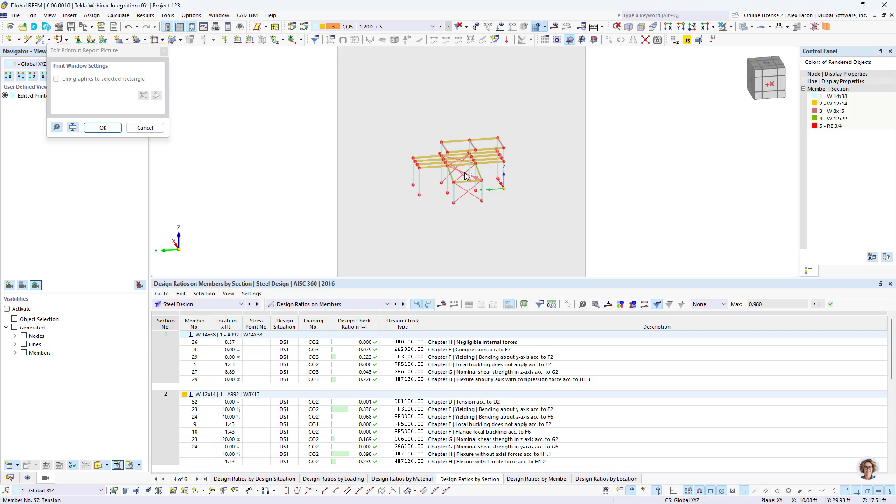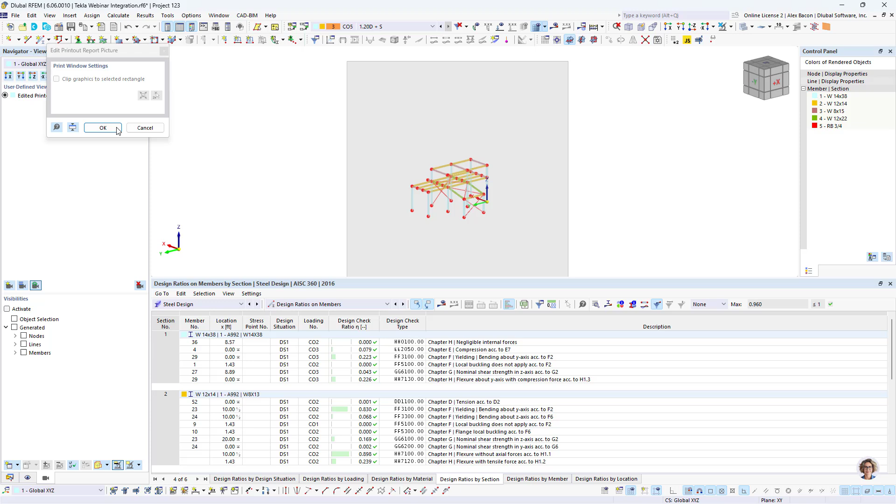If you want to edit this graphic, you can right click and hit edit, and you can frame it differently, change the perspective, and also change the sizing. You can also change the rendering, or show loading, and change a lot of different things there.

Next, if we want to show some of our steel design results, we can do that. We turn on our steel design results so we can show those graphically here, and then we can print this graphic to our printout report by hitting Save and Show again.

And then that graphic is added to the bottom here under our steel design. And if you want to also add in the steel design detail checks, you can do that as well. So if you want one of these detail checks shown in the report with the equations and everything and references to the AISC standard, we can go down here to Print Graphics to Printout Report.

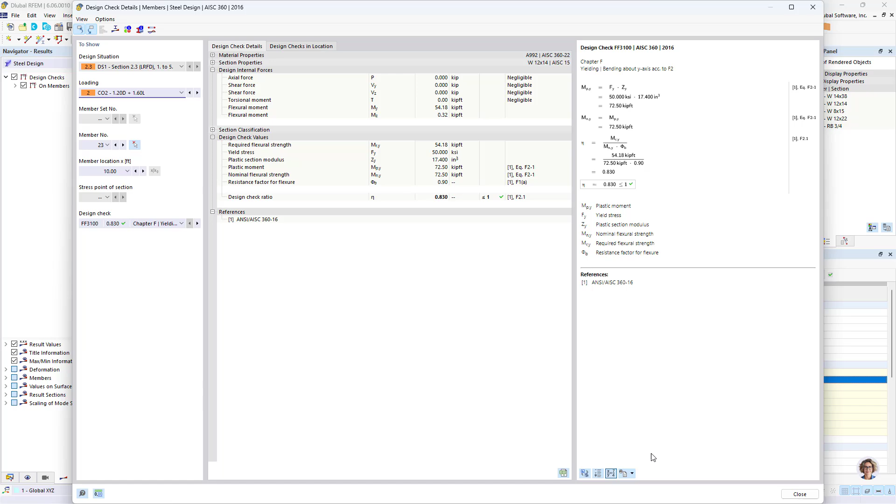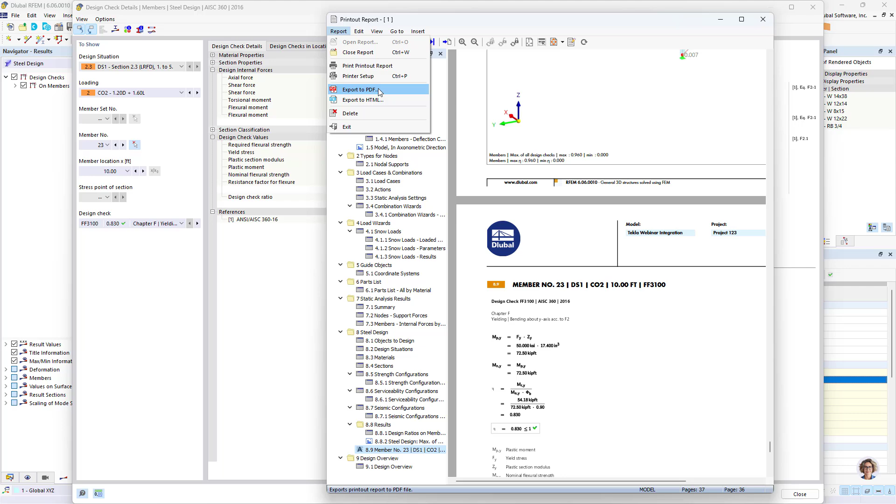And then we can again open our printout report, and we can see that information has been added here. And so then you can take this report and you can export it as a PDF if you'd like and share it.

Also, I would like to note in the report, you can change what is shown in the report here by going up to this button, and you can edit what is being shown in the report, and you can also save templates as well, and you can move information around along the printout report navigator on the left hand side here.

So that is all I wanted to show regarding the Tekla integration with Rfem. I wanted to end on some future developments that we're going to add into this integration. I want to start off by saying these are the planned future developments, of course, and they are in order of planned release dates, listed from the soonest release date to some more distant dates.

So the first thing we're going to add to this integration is member sets. These will be transferred between Tekla and Rfem, and this should be available either next week or the week after.

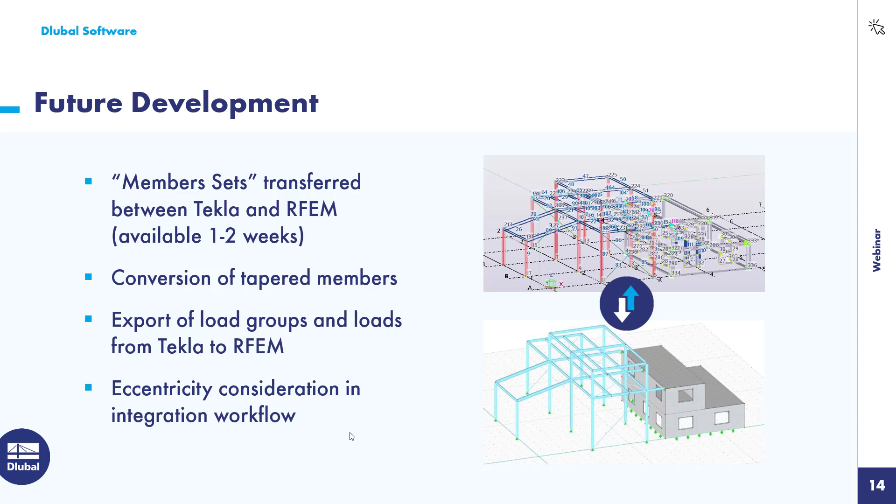And with that said, I will hand it back to Amy to finish off the presentation.